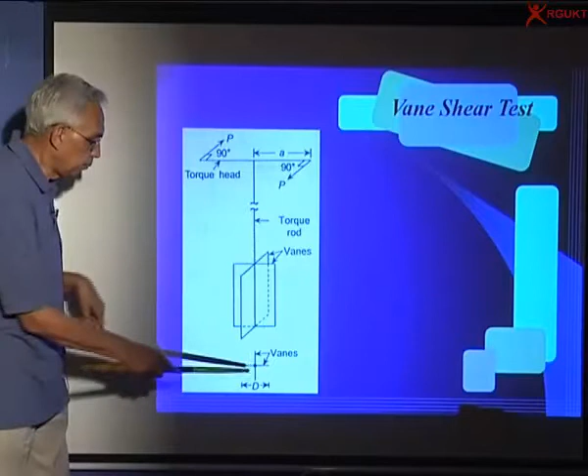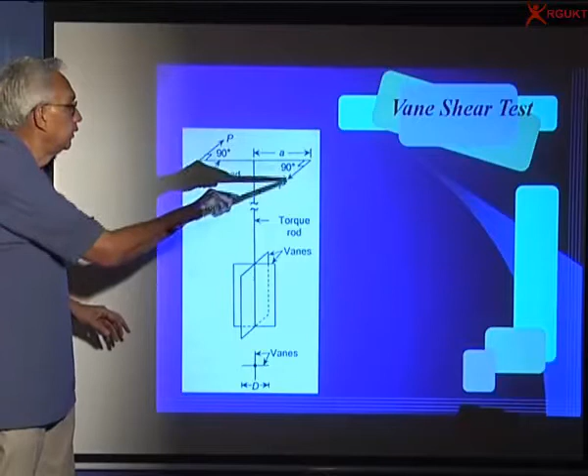Let's see the behavior of soft soils and determine strength using the Vane shear apparatus. It's a simple device with a rod with two blades, called vanes, one in one direction, the other perpendicular to it. Look at the plan: this is one vane, this is another. You have a handle, and by applying force you rotate it to get a torque. You can put a torque spring to measure it, or if I know P and the lever arm, I can find the torque equals P into 2A, where A is the radial distance.

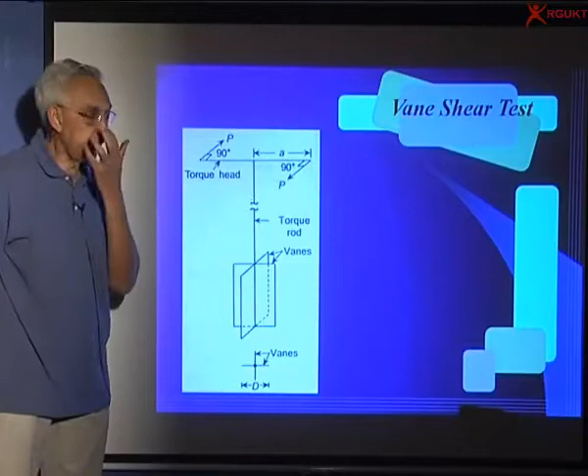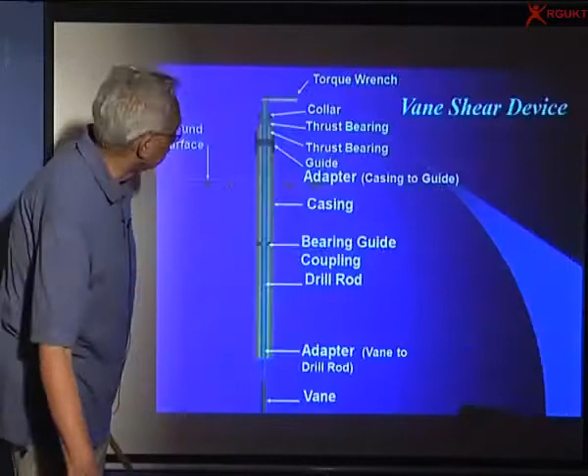So you measure the torque to find how much force or moment is needed to rotate it inside the ground. The actual field equipment looks like this, called a torque wrench. You have a collar, a thrust bearing, and a guide so it stays vertical and doesn't incline. Here is the rod that goes into the ground, and the vane is below the bottom of the hole. If the bottom of the hole is here, you push it at least 1 to 2 diameters so the soil is undisturbed. Here is the ground level. You can make holes at different depths and push the vane to do the test.

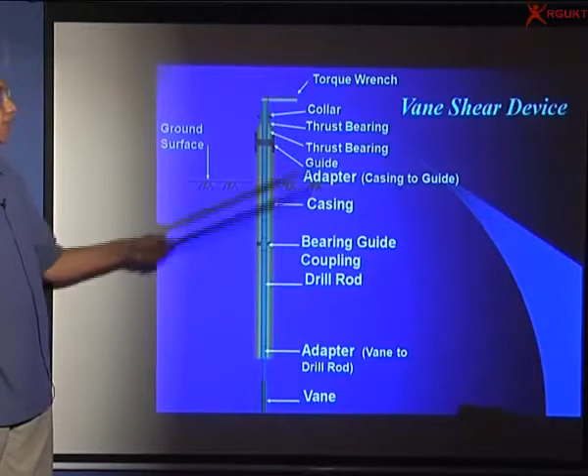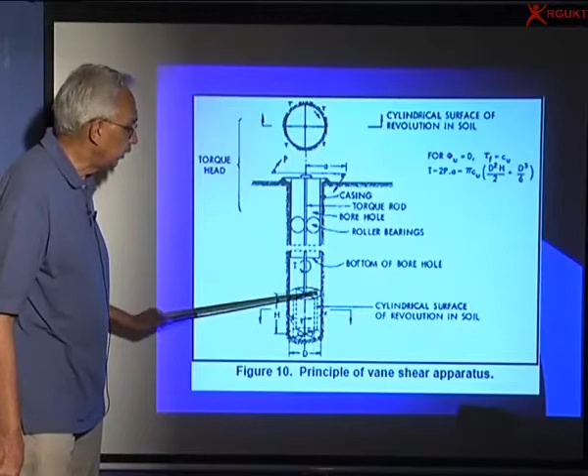So this is the in-situ vane shear device, with all the bearings. When you rotate it, what you get is a cylinder. This is one vane, another vane, and you are rotating, so a cylinder of height h and diameter d is formed. The undrained strength is mobilized along the cylindrical surface, and along the top and bottom surfaces. This is performed at the bottom of the boring by pushing the vane below that. It's a four-sided blade pushed into the soil, silt, clay, etc.

We determine the peak undrained strength and the remolded one. Peak is the maximum strength obtained on the first test. When I rotate it about 5 to 10 times, I completely destroy the structure, giving the remolded strength. The ratio of these two is called sensitivity, equal to the undrained strength at peak divided by the undrained strength for the remolded value.

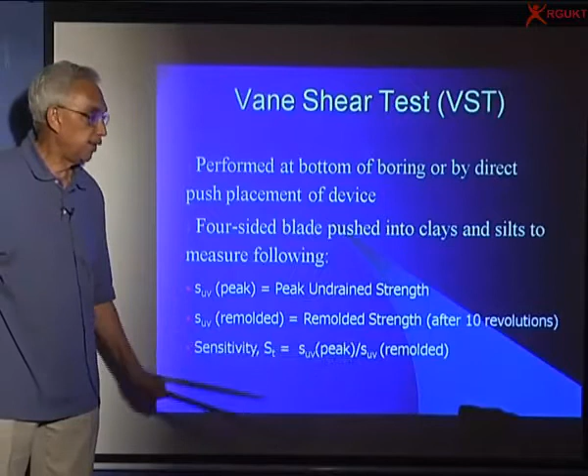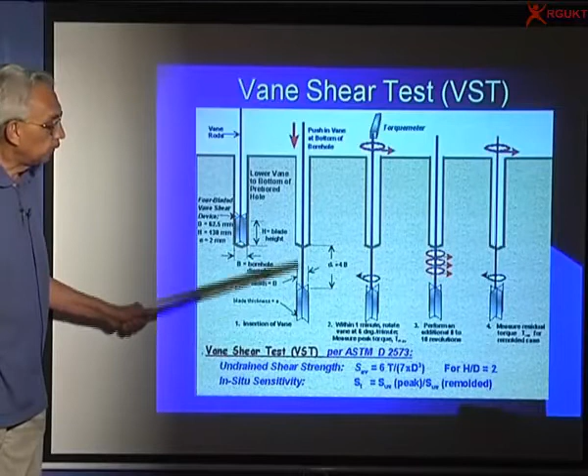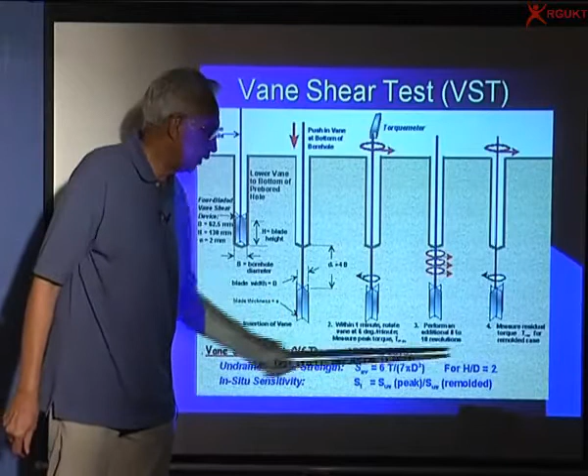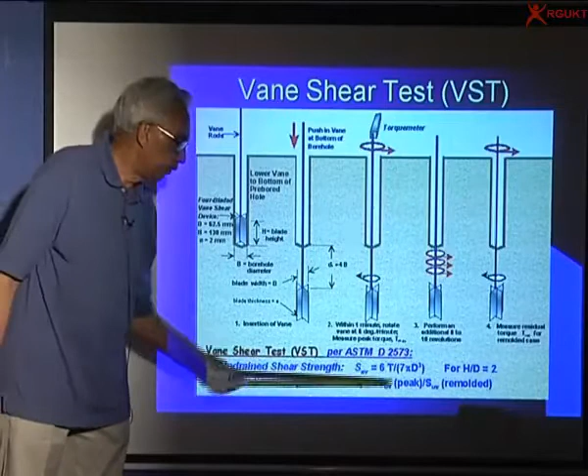This is the schematic of the test. Here is the borehole. You put the vane, push it sufficiently deep so the disturbance due to boring is removed. Apply torque here, rotate it, and determine the peak value. Then rotate 3-4 times, or maybe 10 times, to get the remolded strength and the residual strength. The equation is generally around 6T by 7 pi d cube if h by d equals 2. From that equation you can find the undrained strength equals 6 times the torque by 7 pi d cube. Doing the peak and residual test gives you the sensitivity.

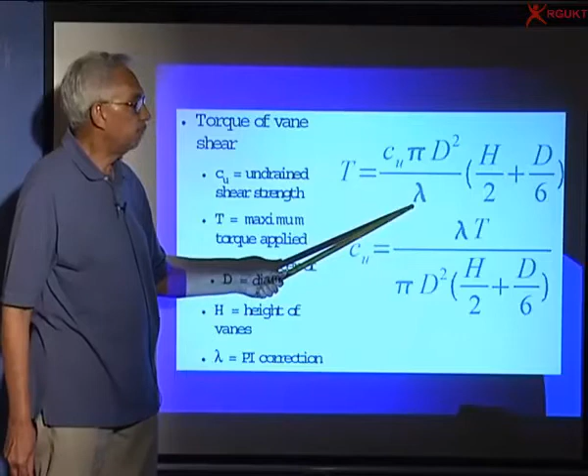We write torque as equal to C, the undrained strength, pi d square, the parameter lambda, and h by 2 plus d by 6, where lambda takes care of the mobilized strength. It's also a function of the plasticity index because of the speed at which we rotate.

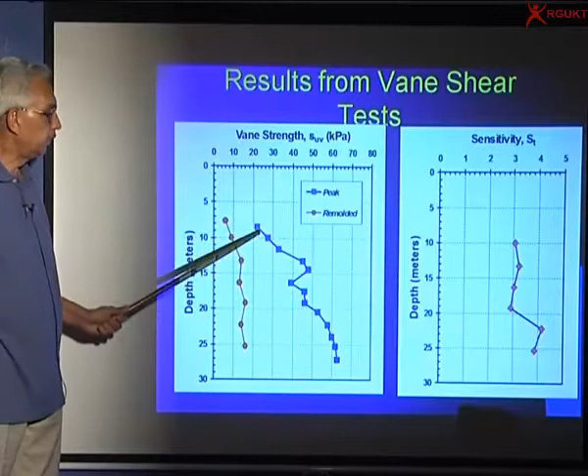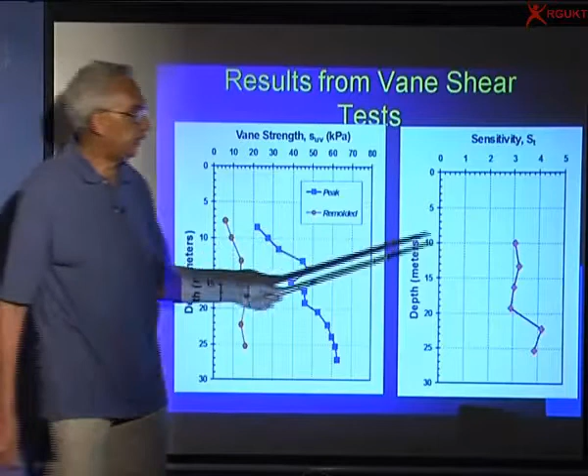If I plot vane strength with depth, I can do tests at different depths - 5, 6, 7, 8 meters, etc. - and also determine the residual strength. If you take the ratio, you'll find the sensitivity in the top 20 meters is around 3, but deeper it's more, something like 4.

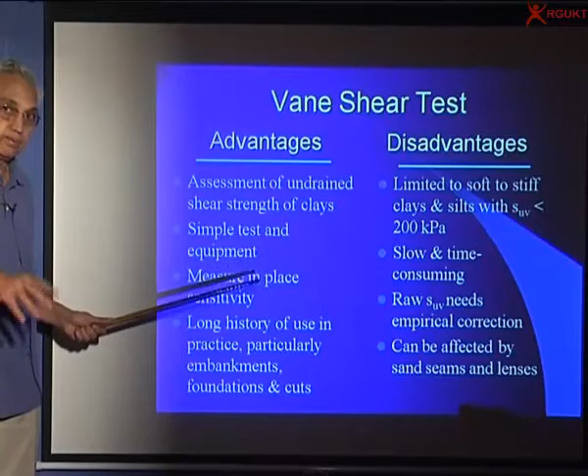So the advantages of the vane test are: you can get the shear strength of clays very easily, it's a very simple test, you're measuring in the ground, you don't have to bring it to the laboratory, and it has been used for quite some time.

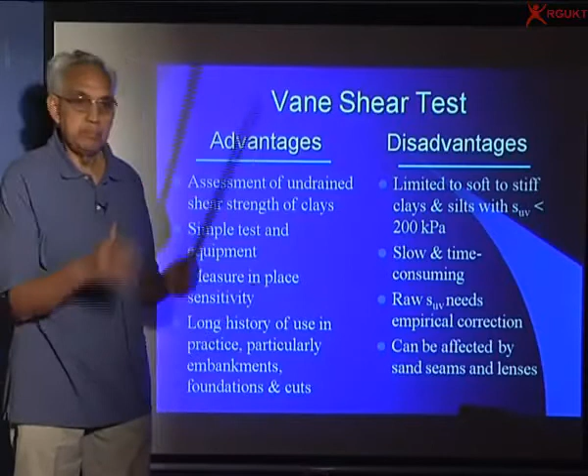Now what are the disadvantages? You can use it only for soft to stiff soils, not very hard soils. You cannot use it for sands, and the strength has to be less than 200 kilopascal. It's very slow and time consuming because you have to make a hole, push the vane, etc. You need correction for various affecting factors. It can also be affected by nature - the clay may have some sand, and if it does, the Cu value we measure may not be very good.

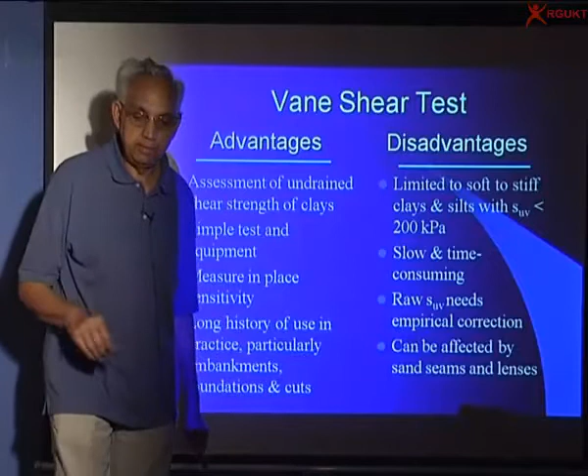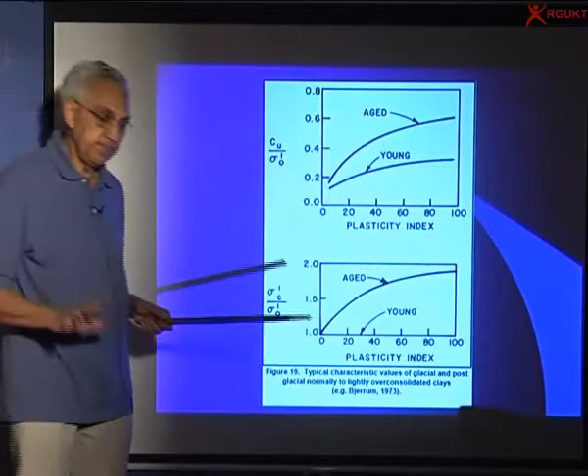It also depends on how old the clay is. Suppose it's recently deposited - when I say recent, it's geologically recent. For a geologist, anything less than 1 million years is called recent. Some soils have been deposited in the last 20, 30, 40 thousand years; they behave like young clays. Those deposited maybe about 1 million years back, we call aged.

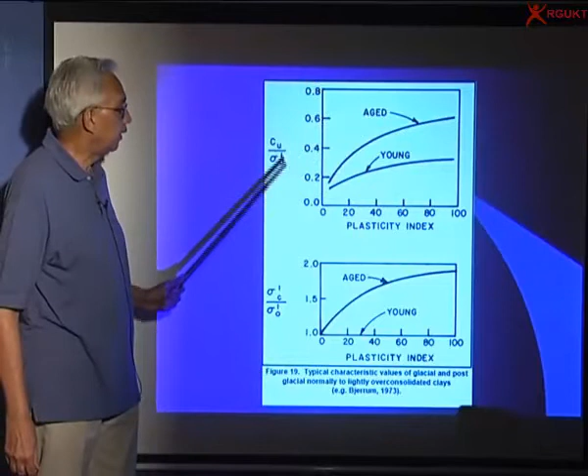And this is how Cu by effective stress varies. So we need to find this out - it's also a function of plasticity in terms of the over-consolidation ratio.

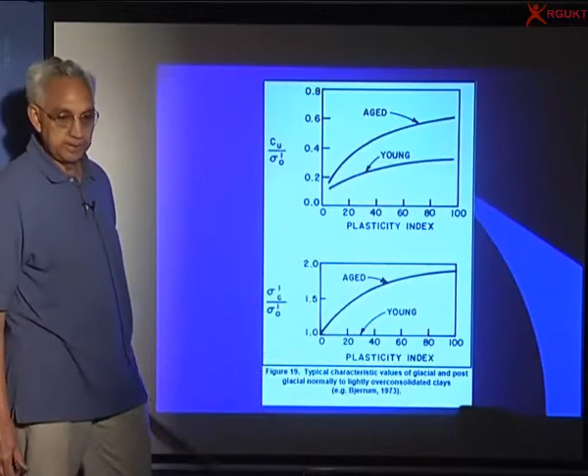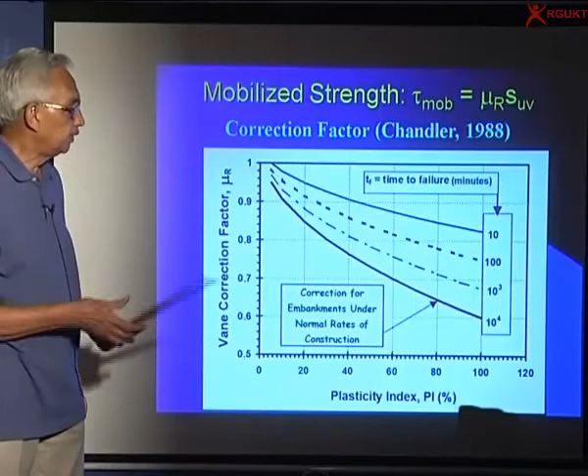The other factor is that we do the vane test in a very short period of time. Time to failure in a vane test is less than 10 minutes, whereas in the lab or field it may take 1 hour, 100 minutes, 1000 minutes, etc. So it's very rate sensitive. We need to correct for this when constructing an embankment on soft clay - it may take 1 or 2 years, so the rate of loading is low and you get a much smaller factor. So we correct the vane shear strength to account for the speed.